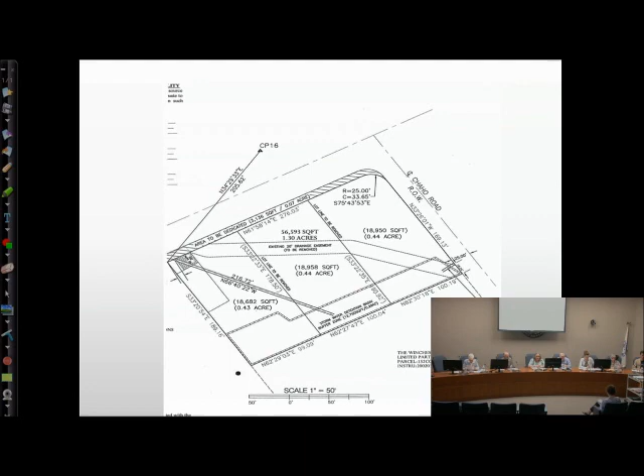Bart, where do they go from here? What's their next step? They'll have to make those corrections to the plat, and then get it signed and recorded. From there, there may be 1 or 2 little conditions left on the site plan, and as soon as those are satisfied, they'll be able to move forward with the project.

So all understand that the lot lines Betty was asking about will be removed on the final plat? Yeah, they'll no longer exist, and it'll just be one large parcel — well, somewhat large, it's 50,000 square feet or so.

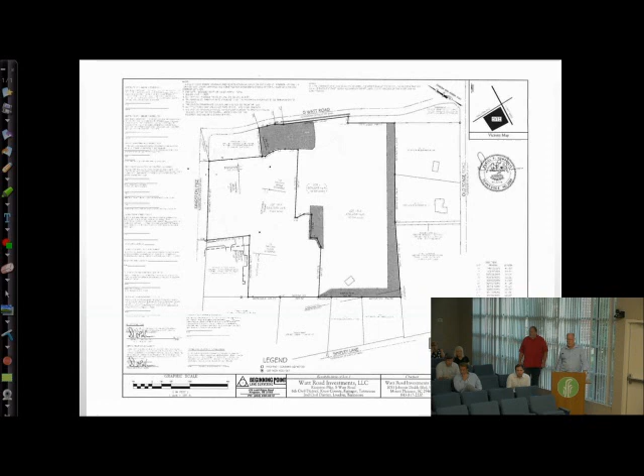Does it affect the open space requirements, splitting it like this? Well, that's one of the things we're working on, the easement aspects, with the town attorney, to make sure there's shared access to that. As was said, the zone does make provisions for internal subdivision like this. It is contemplated within the zone, so from a planning standpoint, we're looking at the entire development together.

But from a financing standpoint, they want to separate it out. Does anybody else on the planning commission have any questions or comments?

Now, we can go ahead and do that and then let them show us what they want afterwards? Okay, do I have a motion? Move for approval of the re-subdivision plat for the Watt Road Investments parcel 7803, 8182, 95, 9501, 96, and 97 as shown, subject to the two stipulations. Second. All those in favor? Aye. And you have some show and tell.

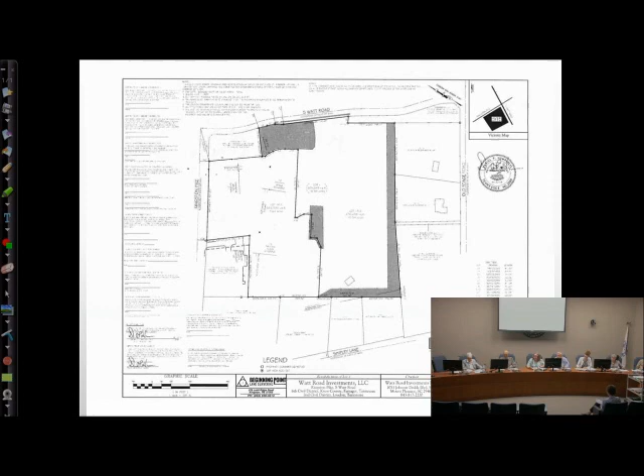Yes, my name's Mark Bollick, I'm the civil engineer on the project, 1313 Calmia Road. We just want your input on four quick items, and I'll start with the easy one first. I brought pictures.

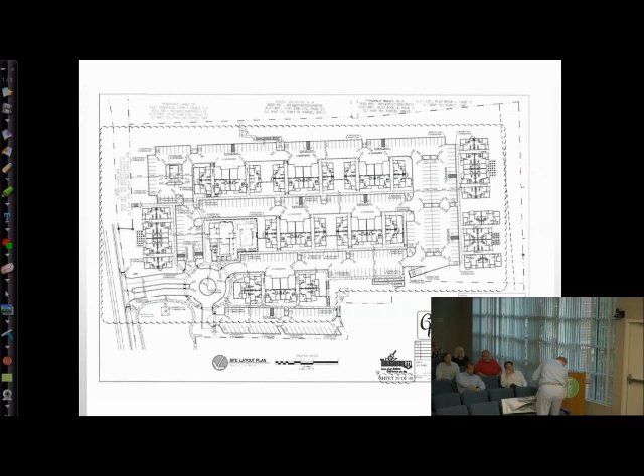Oh, he did put pictures. Let you two share. Okay, thanks. I brought big pictures. You two share.

In regards to this, as part of our last staff review meeting, staff did not like all the HVAC units clustered between the 3 and 4 story split buildings. So the architect went back and put a flat roof in the middle of the building so we can put all the units on the roof, properly screened, meeting all the town requirements. But he wanted some feedback from you to make sure this isn't something you're going to look at next month and say no.

So, we're going to make this short and sweet, I hope. We'd like, if y'all have any comments or questions, please speak up now. So they will be completely screened, yes, you will not be able to see the units. We will meet all the town requirements regarding the units. They will be properly screened, behind the parapet wall of the flat roof.

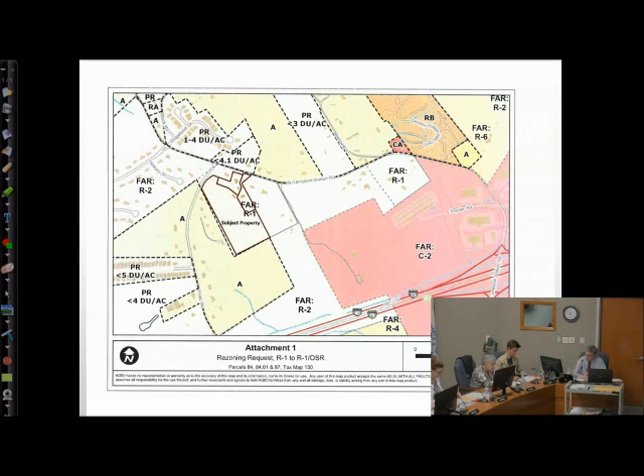The site has some topography on it, as you can see here. There's some drainage issues, some steep grades on it. There's one little potential depression that could be a sinkhole up in the northwest corner or section of the property, or in that vicinity.

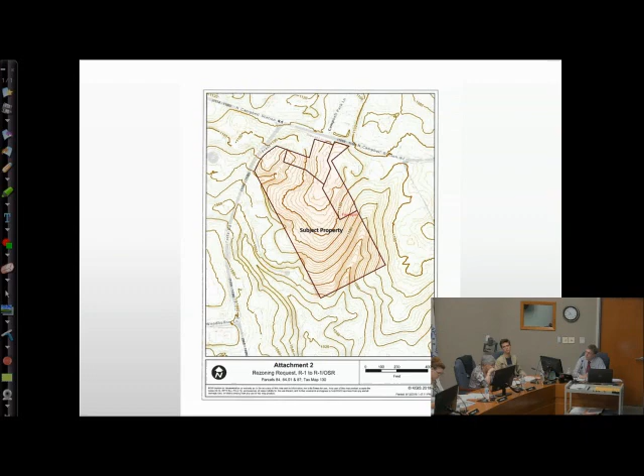It doesn't really show up at this scale, but it's there if you zoom in closer. As you can see, the property is fairly heavily wooded.

The R1 OSR would be consistent with the future land use plan, and we think it would also be fairly consistent with the existing land use in the area, the zoning in the area, and the overall development pattern. The OSR aspect would allow them to better design around the site topography and the wooded nature. So it's a fairly reasonable rezoning request. I think it would be a good fit for the area.

Of course, it's being workshopped tonight. It's just on here for discussion. I don't know if there's discussion here tonight for the request. Does anybody have any questions for Bart to start with?

One other note is that it would probably also require a sanitary sewer line extension. Based on the KGIS data, there's not one immediately at the property, but there are sewer lines in the area. I say that because typically the building sites are a little more clustered in the OSR overlay, and so in all likelihood you need to have sewer run in there.

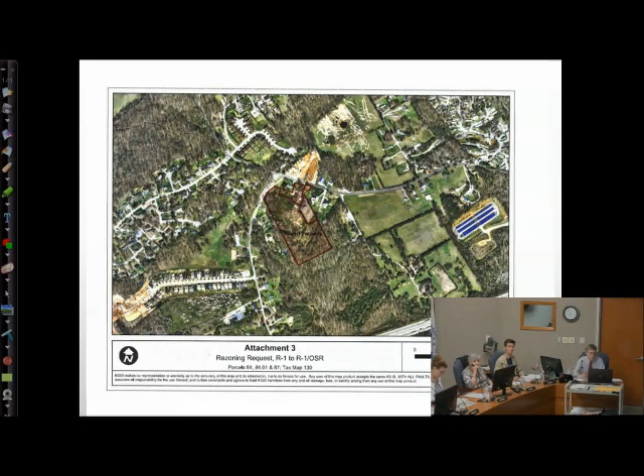Yes, I'm Richard LeMay, the engineer representing the developer. He's described what we want pretty well. The reason we're asking for this is so we can cluster the lots. They're going to be detached houses, but this will allow us to keep the same density and move away from some of those sensitive areas. I wish I had some exhibits to show you, but I don't have anything.

Do you guys know how many lots you want to put in there? 22. Okay, which is the allowable amount? That is, yes. Staff would also probably want to see the lots put together into a single tract as part of the rezoning as well.

What's the downside, Bart, is there any? I think it's a good fit for the property. It's got some topographic challenges, it's a wooded site. The surrounding area is a mix of various density residentials. It's at the edge of the town, so some of those properties you see are actually out in Knox County, but there's some higher density residential development that's been done in that area. In terms of detached single family, there's some more scattered single family development. The zoning pattern is again a mix between Farragut zoning and Knox County zoning, but some of those areas out there are zoned in the county as planned residential of various densities, that's the PR zoning, I think that's a county designation. And then there's some of your R2, and some agricultural zoning out there. So it's a mix of different density single family type residential, and we think it fits in the area and fits with the property.

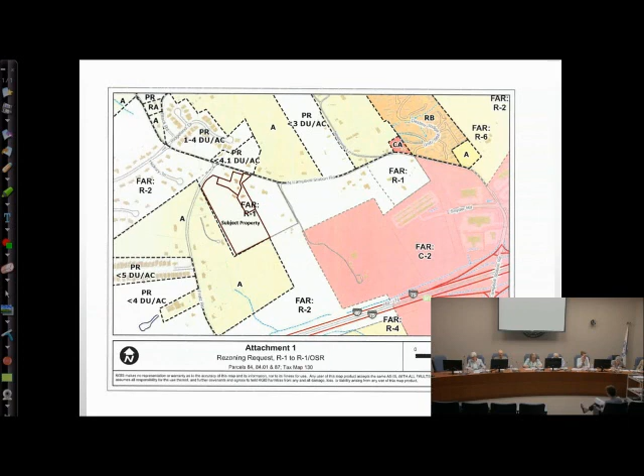Currently we're looking at the possibility that there's a house on that lot that fronts Campbell Station. We may exclude that from this development if possible, not included in our acreage that we're developing for the subdivision. That was not one of the 22 lots I mentioned earlier. So that's one possibility we're looking at, keeping that house on that lot, including it as part of the whole development.

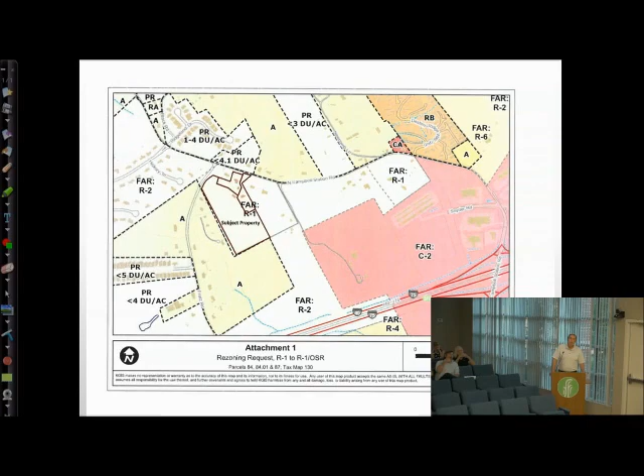Right, okay, approximately where is that? It's the second house from the intersection with Fritz Road. Okay, those back toward Farragut are houses. Okay, that one. Could you switch over to the aerial? Ms. LeMay, see if you do better on the aerial, so you would not use that access that's there now for this. No, the access will come off Fritz Road.

What this rezoning does, it doesn't increase our density at all. What it does is allow us to save some of the trees and stay out of some of those areas that are not sensitive, but they're not very developable either. So it helps everybody to keep those as open space and develop the part that we can.

And this is for discussion purposes only tonight. Yes.

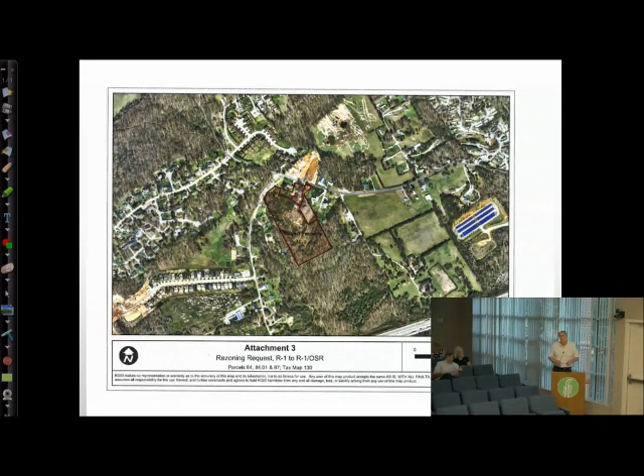Anybody else have any questions or comments? It seems reasonable to me. Appreciate it.

So will you be back next month, or is it a little bit farther along? Well, he's gone now, so.

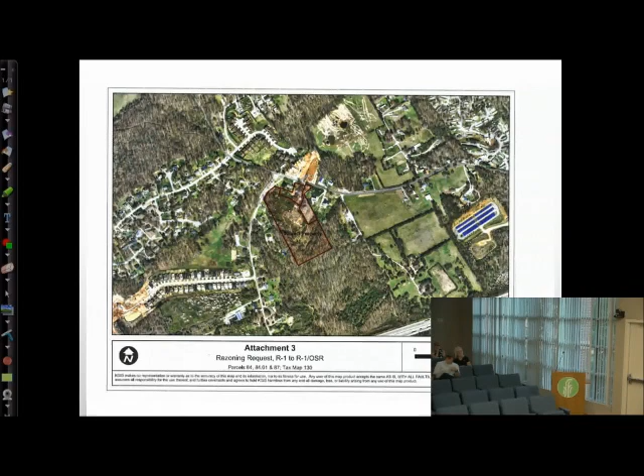So we're moving on now to item number 8, discussion and public hearing on a preliminary plat for the Brass Lantern subdivision, parcel 012, tax map 162, 801 McPhee Road, 22 acres, 30 lot, zone R-1, OSR, pending.

Wait a minute, did we miss one? Homestead Landing LLC, we missed one? Item 7 should be on, yeah, you may have. Oh, I'm sorry. Was that the one we just discussed, isn't it? No, that was item 6. This is the one we just discussed. Okay, another one from North Campbell Station, okay.

Discussion on a request to rezone parcel 93.01, tax map 130, off North Campbell Station Road, 7.6 acres, from R-2 to R-4, Site Incorporated applicant.

And this is also for discussion only, is that correct, Bart? Yes. Okay, this is another rezoning request.

It's in the same general area, actually just a few parcels down from the property you were just looking at. It's on the southwest side of North Campbell Station Road, or the south side because of the curve in the road. It's approximately 7.6 acres. They want to go from R2, general single-family residential, to R4, attached single-family residential. The property fronts approximately 675 feet on North Campbell Station Road. The R4 would not currently be consistent with the future land use plan, so the zoning would require an amendment to that plan, which right now calls for that area to be very low-density residential.

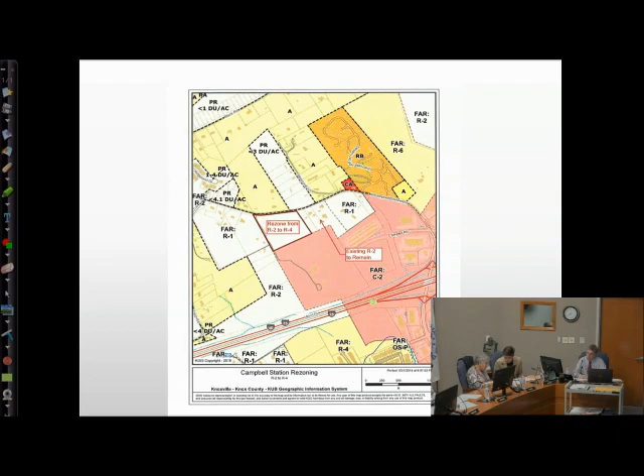Probably the biggest issue, and I don't know if anyone is here for this project, is that R4 zoning specifically requires access from a street that meets minimum design standards, and right now that section of North Campbell Station Road does not. So any rezoning would have to be conditioned on improvements—probably lane widening, curb and gutter, and pedestrian facilities—in addition to any infrastructure they'd have to put into the property. This property also doesn't have sewer immediately available, but it is in the area, so that would have to be extended also.

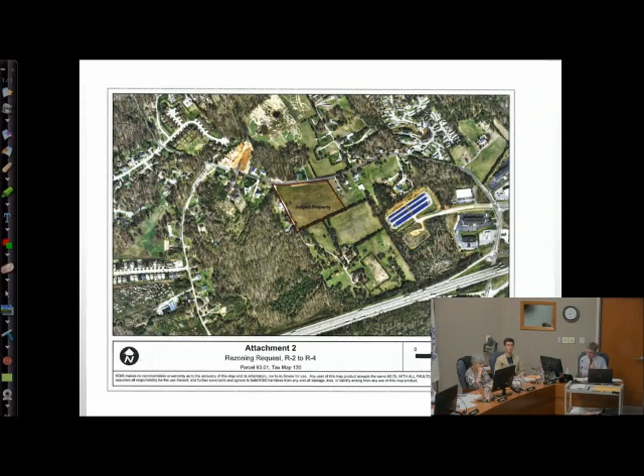Grant Berry, with Site Incorporated, 10215 Technology Drive, Knoxville.

So are you aware of both the road situation and the sewer? We're aware of the utilities. I don't believe we were aware of the road situation.

When we talk about that road, if in our dream world Campbell Station Road ever gets widened, what do we think it would be widened to—12-foot lanes, curb and gutter, or? That I don't really know, I'd want to talk to the town attorney on that. I know right now it's classified as a minor arterial in that section, and it doesn't meet our current standards for lane width, curb and gutter detail, or pedestrian facilities along it.

So you mean for the R4 zone? Yeah, the R4 zone. For the R2? Well, it's currently zoned R2, but they could develop at R2. In order to get to R4, one of the specific requirements in the zone is that the property has to access a street that meets current standards—but that's not true for R2.

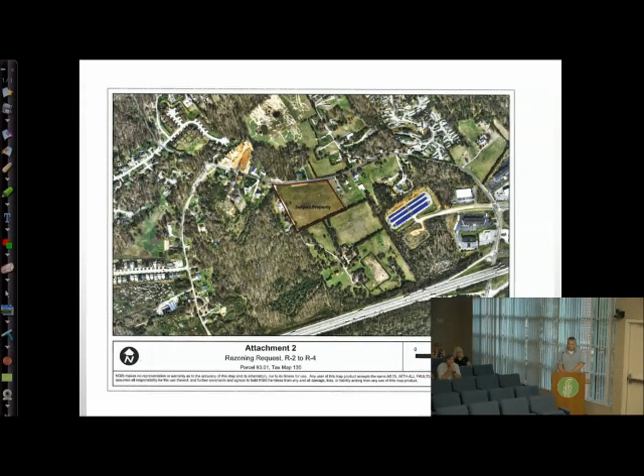Right, and so your preference—why is it you're wanting to change to R4? Because R4 allows attached townhome-type residential development. So I'm assuming you think you'll make more money with the R4 than the R2, is that right? As the engineer, I don't want to make a difference either way, but the developer, that is their preference, yes.

So how many more residents will there be on this property going from R2 to R4? You could go from, what is it, 7.5?

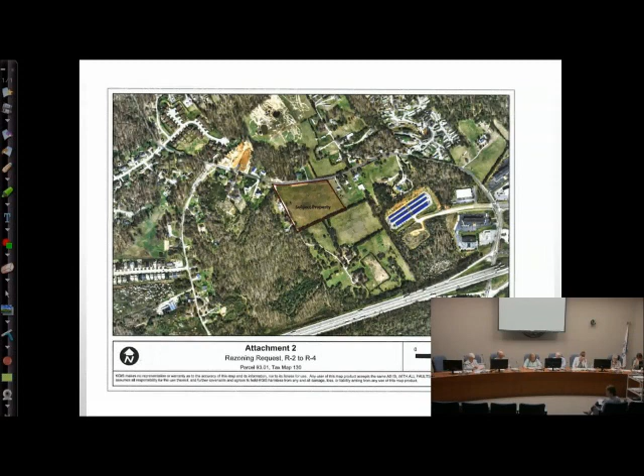Agree with Ed. Any more questions or comments?

So this has been for discussion only tonight. We'll move on now to item number 8, discussion and public hearing on the preliminary plat for the Brass Lantern subdivision, parcel 012, tax map 162, 801 McPhee Road, 22 acres, 30 lots, zoned R-1, OSR pending, Homestead Land Holdings LLC applicant.

This is a preliminary subdivision plat request for the Brass Lantern subdivision. You heard the concept plan at the last meeting and approved that, subject to several conditions. It's an approximately 30-lot subdivision with a single cul-de-sac and a significant amount of platted open space.

Currently the property is in the process of being rezoned to R1 OSR. I believe that's had first reading, so that's before the Board of Mayor and Aldermen, and it'll be coming up for second reading at the next meeting.

They have a walking trail connection that extends from McPhee Manor to the north down through the development and then accesses McPhee Park to the south, and they've been coordinating with town staff to make sure that access point at McPhee Park will work with the park improvements going on.

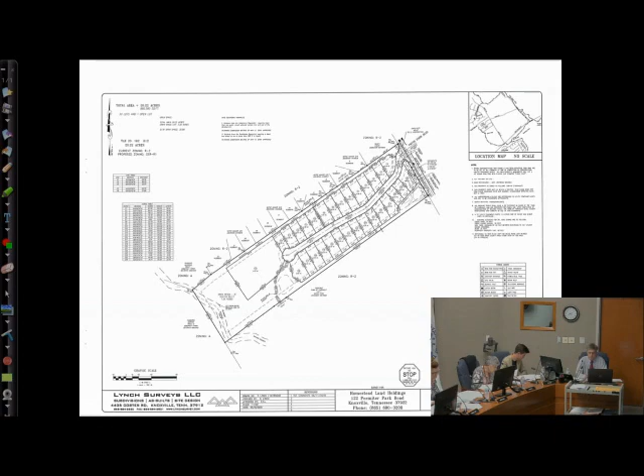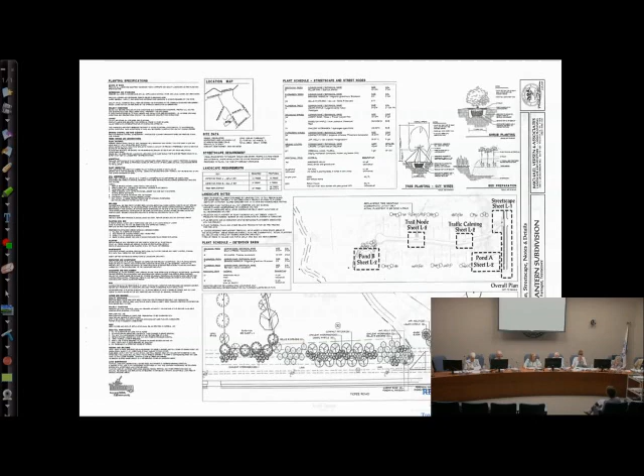Does anybody have any questions or comments? We've got some other slides if you're interested in looking at them. There's some on the landscaping they're doing along the detention basins and at the street frontage, and also on some of the landscape islands that are part of their traffic calming streetscaping plan.

Are you all okay with that? Well, go ahead, tell us who you are first, and then I'll ask my question. Russ Rackley with Rackley Engineering here, representing the applicant.

We're fine with all 9 conditions. Most of them are minor drafting cleanup stuff, and we don't have a problem with that. Okay, good. Anybody else have any questions or comments?

Do I have a motion? Move for approval of preliminary plat for Brass Lantern subdivision, parcel 012, subject to the 9 stipulations. All those in favor? Aye. Opposed? Thank you.

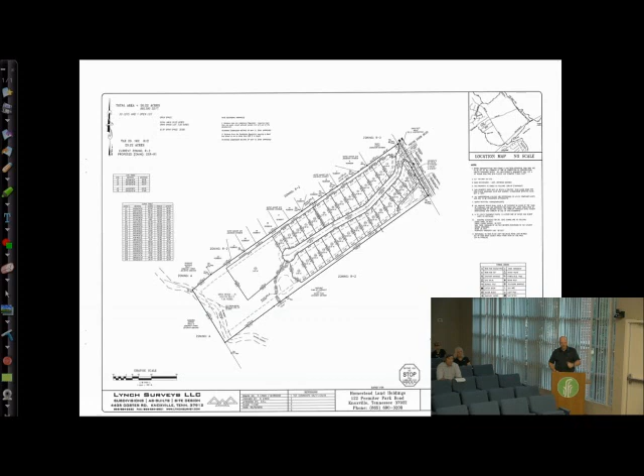Item number 9, discussion and public hearing on preliminary plat for Phase 1 of Brookmere subdivision off Virtue Road, parcels 22 and 44, tax map 152 and 152F, 87.70 acres, 90 lots, zoned R-1 OSR pending, Lose and Associates Incorporated.

This is a preliminary plat for Phase 1 of Brookmere subdivision, formerly the Harville property off Virtue Road. It's zoned R1 OSR, that's been finalized now. The concept plan for the project was conditionally approved in March of this past year. This current phase is for 90 lots out of approximately 142, I believe, which was on the original concept.

It also includes most of the streetscaping elements, the boulevard area, and 63 out of the 87 total acres. So it's a fairly large Phase 1. It's a good chunk of the development.

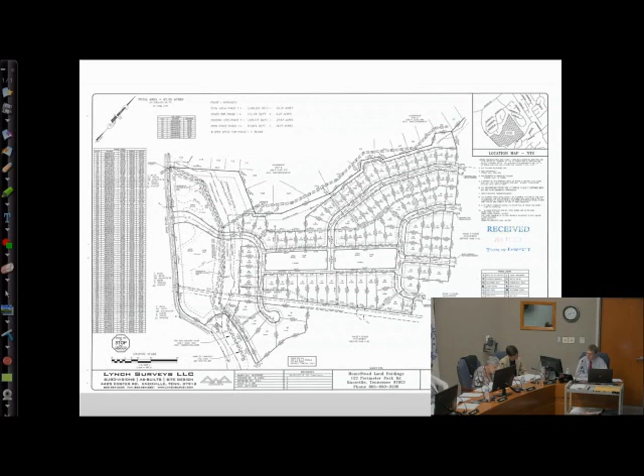You have our comments there in front of you in terms of things we think it needs to be approved subject to, if that's the board's pleasure. They are requesting a variance for some design speed issues on some curves. That's one thing that does need to be discussed, and you probably need to take separate action on that if you have a mind to deal with it. We can talk about that.

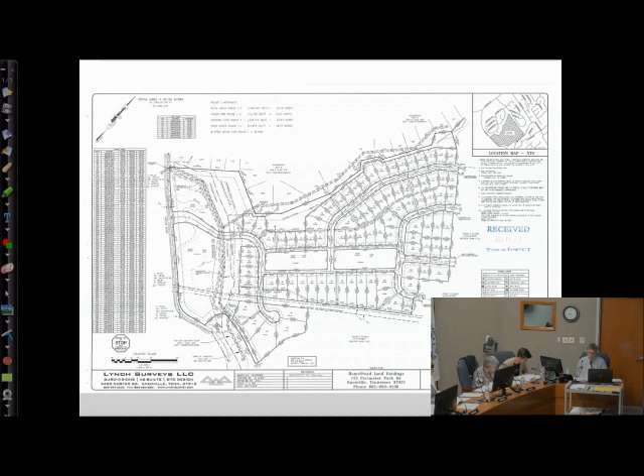I don't know if you have any other questions on any of the other comments, or if the applicants have any questions, and then maybe we can circle back to the variance, unless you want to do that on the front end. We can go ahead and address the variances if you'd like. I'll be happy to speak to those or answer any questions regarding them. Let's go ahead and do that. Sure, start with the variance.

What we're asking for is to reduce the required design speed for vertical road design on primarily 3 locations. Part of this is due to the effort to save the trees in the center, and then to save the trees around the perimeter, which is kind of dictating the overall grade across the site.

Currently, your subdivision regulations require a vertical design speed of 35 miles an hour. However, your horizontal road criteria in your regulations is equivalent to about a 25 mile an hour design speed. So we're asking—and I believe a letter from Lose and Associates was included in your packet that defines the locations—where we're wanting to request the crest and sag K values to be equivalent with a 25 mile an hour design speed.

In 3 locations, and in 1 location on Kendall Hunt Lane, to 20 miles an hour. Again, the effort in doing this is trying to make the grade work across the site.

We also see it, I think Mark even commented in our meetings that you ask us for traffic calming and to do things to slow people down, and sometimes a narrow, crooked road will do that as well. In this case, they're not that crooked.

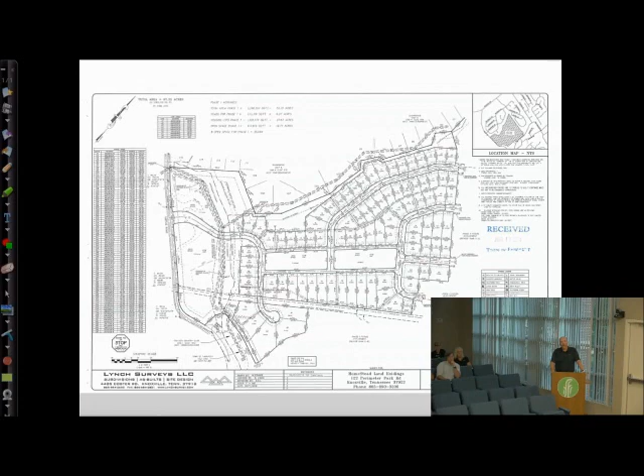Can you specifically point out on here the crests and sags that you're requesting? I can on the plan and profile, if you want to look at the plan and profile sheets. I don't know if that's in here, Russ. I don't think it is, to be honest. Do you have anything with road stations on it?

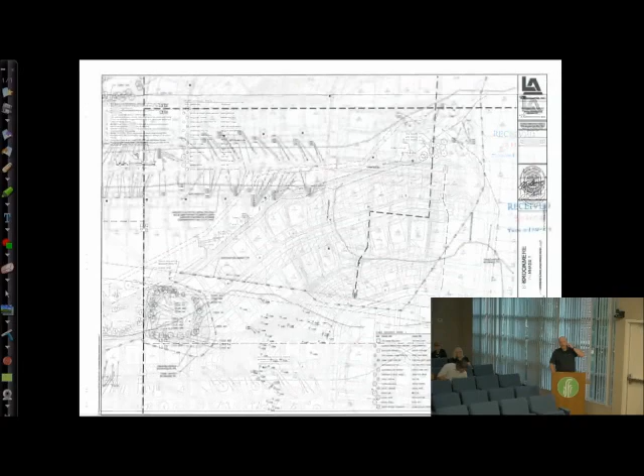I'm toggling through real quick. I don't think those were put in, in the comments that y'all had, and I think Mark sent you a set of that.

Daryl's comment, Daryl being the town engineer, is number 14 on the staff comments and recommendations. I spoke to him briefly about these, as much as I can, not being an engineer myself. It's not really my bailiwick there, but he's opposed to any of the variances on the sags, or I should say on the crest vertical curves.

Generally he's not flat out opposed to some of the sag vertical curves, although he questions some of them as to whether they're needed. He's also to some extent okay with the lower design speed at the stop conditions, which would be intersections. But the crest vertical curves he's really not comfortable with at this point, and he questioned why they were needed on some of the sags.

His thinking was that it might be best for the applicants to meet with him and go over each one of those, try to justify it, and put together a list of the exact areas they would be on, so they could be voted on either individually or as a group, for or against. With all due respect, we did that with the submittal package.

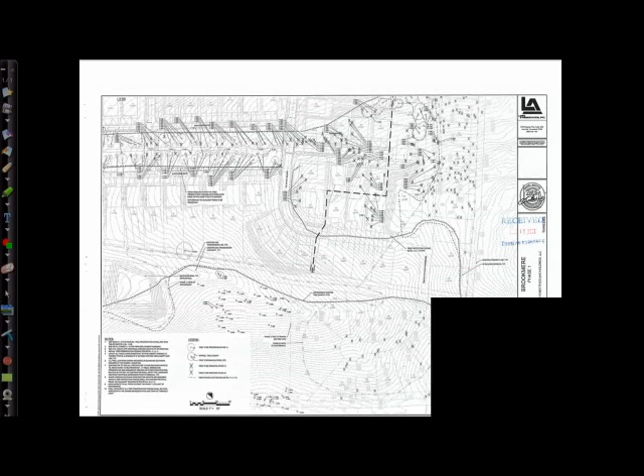But we don't have any situations where we're going up steep and down steep, right? Most of it is where the road's working its way up, or you're coming off an intersection down. There's not a situation, even though it's called a crest curve, where we're coming up at 10% and down at 10%, and it's really a blind curve. That's why we don't feel like it's that big of an issue.

It's — I understand, well let me ask you this. Not quite as hilly as Kingsgate. Let me ask you this, just because I'm a visual person, I'm trying to visualize this.

Where you're asking for these exceptions, I'm going to throw out a question that might be really stupid. You're coming over a vertical, driveways coming out — are you designing to know this location, this is where we've asked for a variance, and we might have an issue here of conflict because they need to be going slower here? Are you envisioning, is where you place your driveways important when you're doing this for cars that might be coming out as cars are coming up?

It could be in more severe situations, but I don't think we have any opposing grades here that would dictate that. And by opposing grades, I mean going up and down, where your sight distance is completely limited by that curve. Most places we're going up and over, or up and down slightly — we're not having that severity.

But definitely, we've not obviously picked floor plans for all these lots yet, but that's always a consideration where we place driveways of where we can get them in.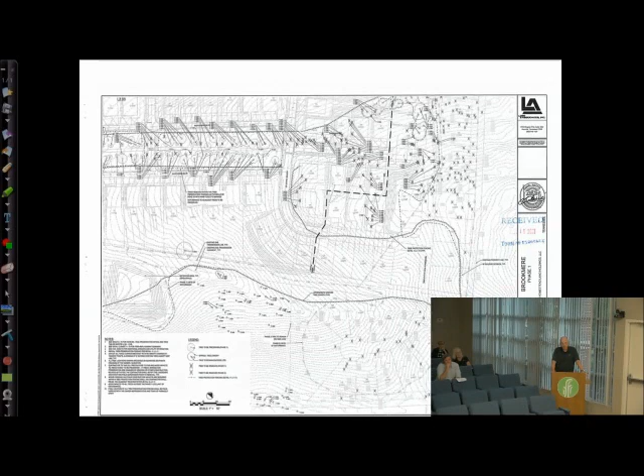I'll say I'm not real comfortable with going against what Darrell was concerned about with these crests and the dips, but the roads are kind of straight where some of these are, and I'm afraid speed is going to pick up regardless of what we have it listed to be. I think most of us know what happens in any roadway where you have a 25-mile-an-hour speed. Nobody's going to go 25 miles an hour. Well, I will, but yeah, I do as well.

Let me ask you this, because your neighborhood may want it if they're dealing with that. We talked about speed bumps. Is that something you would put, and you can't put that in a location where you've got crests, correct? No, generally you would—well, you can put those vertical traffic calmings pretty much anywhere, but you would back off from a sag or a crest and put them in straightaways, where most people, it's human nature to slow down through a dip or a rise. It's just human nature to let off there.

So usually it's the flat, straight sections where the foot gets heavy and it gets away from them a little bit. Well, I'd hate to see us creating, on the crest in particular, a situation where you could have a driveway just over the crest or on the crest, or people that may be there temporarily for a while. They park there because somebody's doing something at their house and they got to be out of the garage, so they park on the street momentarily. I've seen and personally experienced situations like that where it's extremely dangerous, 20 or 25 miles an hour either one, because purely the sight distance. If it comes down to a few trees in a location versus that sight distance, trees lose, in my opinion.

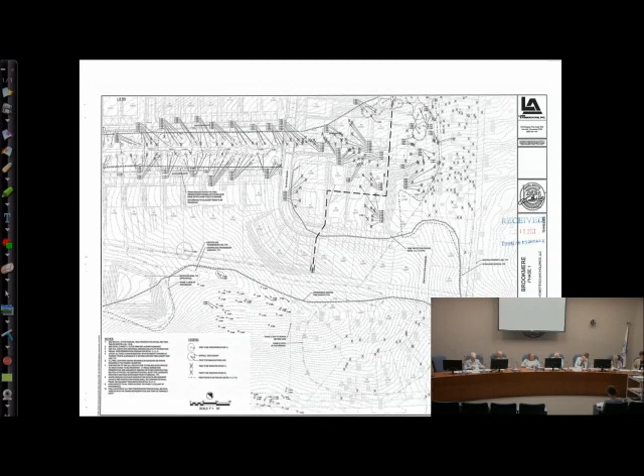I'm talking about that one location. Which one? The one between Station 4+50 to Station 6 on Needle Grass. Oh, that's where we're talking about the requiring fill. Over the bridge, right? But just the crest problems are problematic to me. Well, that's actually a side curve there, and there's no houses there. No, that would be a sag going across the bridge. You start up the other side, so that's that transition from the bridge being relatively flat to going up the hill and then around the corner.

And you don't have anything that you could point out where these places are to us? No, I don't have the stations on what was put in the PowerPoint. But I mean, I was just looking at Daryl's drawings. I'm not in a position to recommend something contrary to what the town engineer is recommending.

I'm sorry, he was talking to, what was it, Commissioner? Well, I was just reading from Daryl's note, but maybe I misread it.

Does anybody else have any questions or comments? Is there anybody in the audience that has any questions or comments, either for the staff or the applicant?

Can you show me, you have the drawings, can you show us where the 4+50 station is, and is that how you say it? Yeah. How do you say 6+0? Yeah, six. Okay, 4+50 and 6+00. Okay.

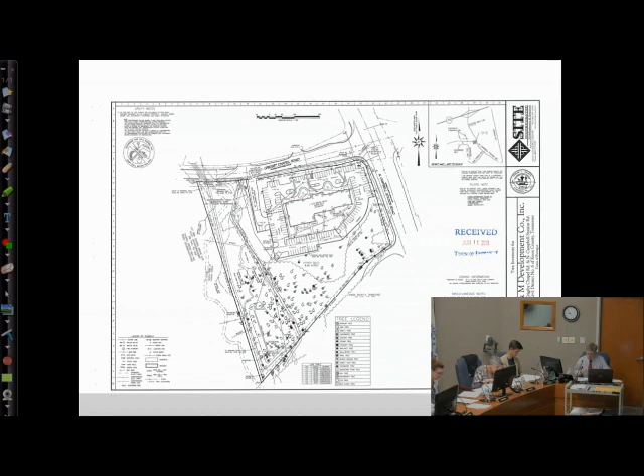The new development is going to be integrated into the existing site. It involves - I don't know if I have a shot that shows it real well, but after the development occurred, they separated out the existing building with a land lease line, and they also put in some other easements for access, and also access and parking in various locations. So they're integrating this expansion of the site into the existing development with those easements.

This involves the new building and some additional parking that's going in. They also want to relocate a section of the greenway. That will require replatting that easement, and as part of the replatting process, they'll also have to dedicate a little bit of right-of-way there on Grigsby Chapel Road.

They're aware of that. That did not make it into the comments and recommendations, so that's an additional note that should be part of the motion, if you are so inclined to approve this, subject to staff comments and recommendations on that. Yeah, that would be number 19. It's noted in the write-up, but it didn't get into the actual list of comments and recommendations.

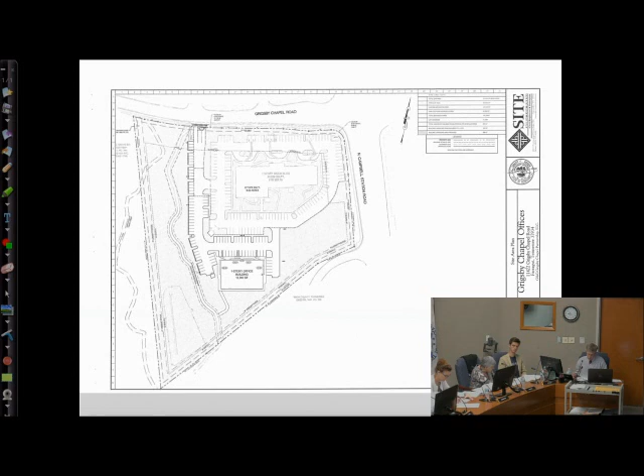Okay, so I just wanted to make sure that got in. I think you can see under the discussion, it's the last two sentences under the discussion in the write-up. I don't know if there are any questions on any of the comments that we have in there. If there are, I'll be happy to address them.

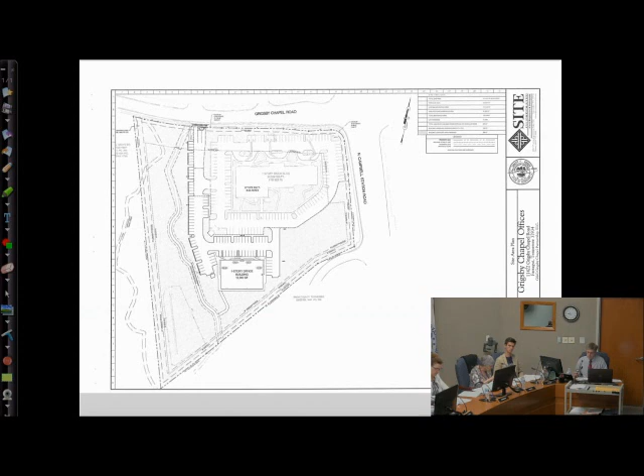Can I just get the point that we need to - is it just, the final note is dedication of right-of-way? Well, if they're going to relocate a section of the greenway that's currently within a platted easement, so that easement will have to be replatted and moved on the property. And because of that, they'll be in a re-subdivision and replatting situation. And it turns out there's a little bit of property, or a section of Grigsby Chapel Road there, that doesn't have the full right-of-way width, so they'd have to dedicate a little additional right-of-way there on Grigsby Chapel, which is fairly typical. It's the same thing the dentist's office had to do that was here earlier.

Is that near Grigsby Chapel where the relocation would be? No, let's see if I can find the right section. I can't quite make out the notes, but I think it runs from somewhere here to somewhere down there.

Right now the easement runs very straight, so they'll be moving it. So they'll be putting some curvature in it? Yeah, in that area they would have to go in and move the easement to accommodate where they want to move the greenway for the project.

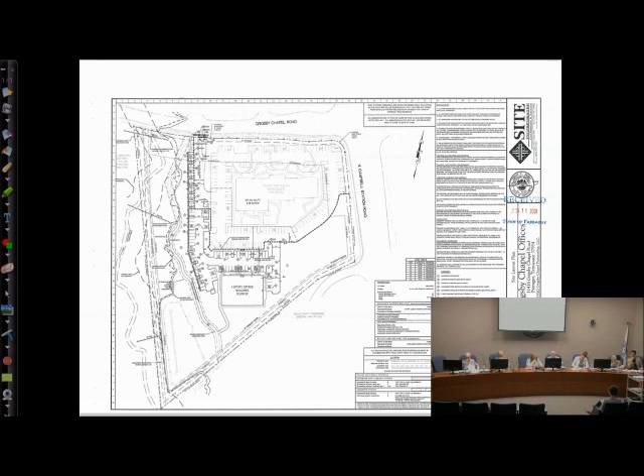There was some concern by town staff that this area up here is going to be a little close, with these parking spaces and the pedestrian linkage they want to bring in running right through here, with traffic turning in. One thing the applicant wants to do is arrange with the shopping center across the street, where the Mellow Mushroom is, for overflow parking. There was concern that when people walk to the parking spaces there could be a conflict between cars turning in and out.

Where this sidewalk area is going to extend, people could step off it into the parking area to access further up the lot, with cars turning in and out. So we wanted to mention that. We don't know if there's a way to address it or redesign that pedestrian connection. The grade drops off, and it would be nice to tie into the greenway there, but the way it's graded could be an issue.

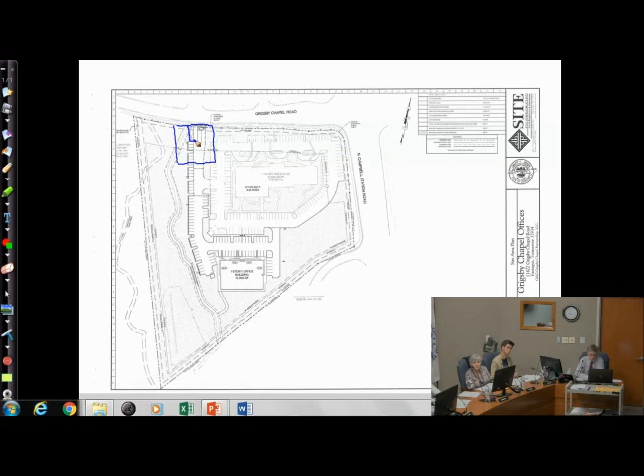Can you tell us one more time who you are? I'm sorry, Grant Berry with Site Incorporated, 10215 Technology Drive.

With the way the grade is through there between it and the greenway, the only way to move that connection would be to eliminate a handful of spaces to pull it further away from Grigsby Chapel. Right now it's 50 feet from the travel lanes of Grigsby Chapel, so any cars turning in would be straightened out by 50 feet, out of the turning movement, giving decent visibility looking up the road before people could get onto the sidewalk as it stands now.

But if we need to eliminate another space or two to pull that connection another 15 feet away or so, that could be done.

Anybody on the planning commission have a thought on that? I always like to be on the safe side when it comes to people walking on sidewalks and trails. I agree.

I'm the same person who spoke last. Robert Hill, 11504 Mountain View Road, Farragut, Tennessee. I walk that greenway almost every day, and I looked at the drawings this afternoon with our planner, Bart. The movement proposed for that greenway, I think, is inconsequential.

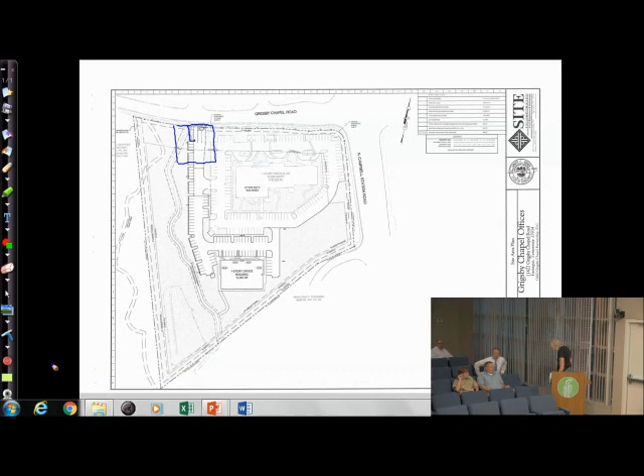Anybody else have any questions or comments? I think we were supposed to see a color and materials board, item number 14. Okay.

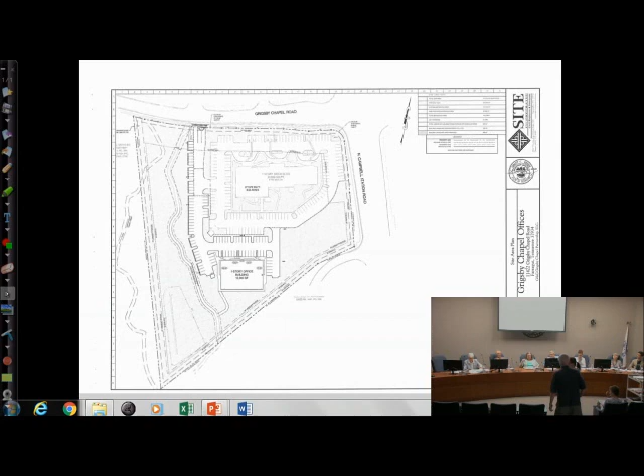Can you tell us who you are? You've never been to a town meeting before, please give us a name and address. Kelly McCarty, and I live at 480 Chapel Grove Lane.

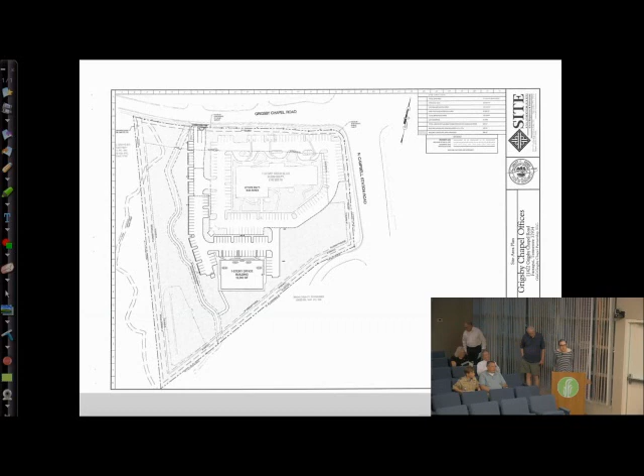My objection is to the additional parking we were talking about a minute ago, to accommodate spaces for the Mellow Mushroom employees across the street. I don't see the need to have extra spaces there and have them crossing the street. If they need extra parking, if you drive by that parking lot for the office that's already built, there's always empty spaces, if not an empty lot. So why they're not parking there already is a question I have. I would not like to see extra spaces added that aren't required for the additional office building requirements.

Bart, is it overparked now? It is an overparked condition. By how much? I don't have the number right in front of me, but I know we calculated that at one point, and they did have to go in and do some redesign work to add additional islands, and also do some pervious paving in those areas. So that was something we brought up. There is more parking there than needs be.

I don't see any need right there. I rarely ever see that parking lot presently full. They're adding 88 more spaces. Yeah, and based on the size of the additional building back there, it's way overparked. They do have potential plans to, at some point in the future, add a third building, so that may be generating some of the additional parking. I know the applicant can maybe speak to the reason for the extra parking.

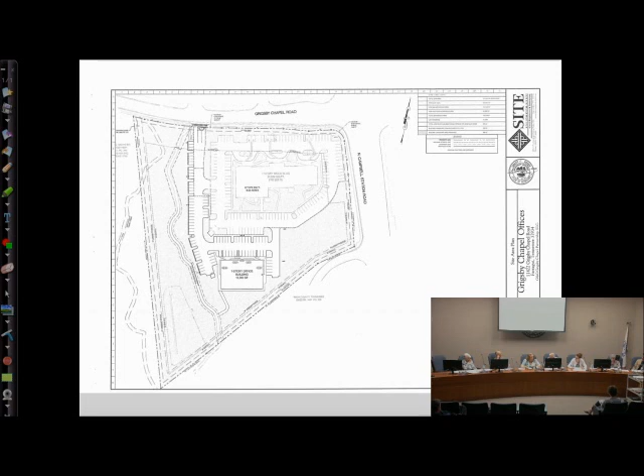That's one of the things that bothers me, the people crossing Grigsby Chapel. But we've passed, in our first budget, a CIP amendment to include a pedestrian-activated, signalized crosswalk, so that people can get across there safely.

Okay, yeah. Do we need to add the verbiage for 19, or do you want us to have that on record? Yeah, I wrote out what 19 should be. Yeah, that would be fine.

With the Grigsby Chapel Greenway being relocated, an associated easement will require replatting, and the replat will need to include additional right-of-way dedication along a section of Grigsby Chapel Road. Does that sound right? Yeah, that's fine. I should be able to read my own handwriting, and I don't, so. That would be 19, subject to 19. Did you guys hear that, and you're okay with that?

Okay, and then they'll be eliminating those 3 spots as part of addressing item 2. Okay, item 2, let me go back to item 2. Oh, wait a minute, no, that's the wrong one.

Item 11 is the one that deals with the pedestrian conflict at the ingress and egress point. So what do you want, and the removal, do you want to take that out and say, instead, removal of the first 3 spaces? That'd be fine. Then removal of the northernmost 3 spaces, is that correct? Is that clear enough for you?

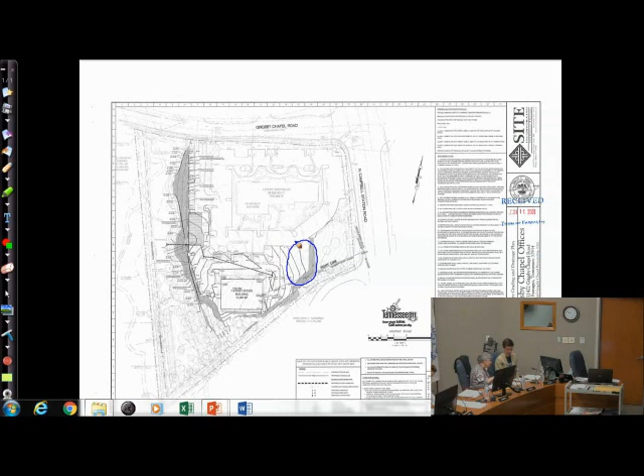It's 10 to 10, they may have to change the tape at 10. So do we want to go ahead and do that now before starting the last one? Yeah, let's take a break. Check real quick. Oh wow, I bet you will. You want some fries? Thank you. Cold fries, yeah okay, I think there's a knife in there.

Another consideration, shown on the second board, is a masonry brick which complements the brick in terms of its height. It's a little wider, it's 16 inches wide, but we feel it would complement the stone, the oversized stone on the existing building, more appropriately than standard 4x8 brick.

I don't know what you mean by that. Do you have something to show us? Why don't I bring the board to show you. I don't have a physical sample, but if you don't mind, I'll come up and bring that.

This is a through-wall stone, a concrete material that's poured similar to concrete masonry units, but it's designed in both color tones and material finish to appear as brick. It's also a structural component and can be used as part of the structure. I believe there are some buildings in the area that have those, although I couldn't give you a good example.

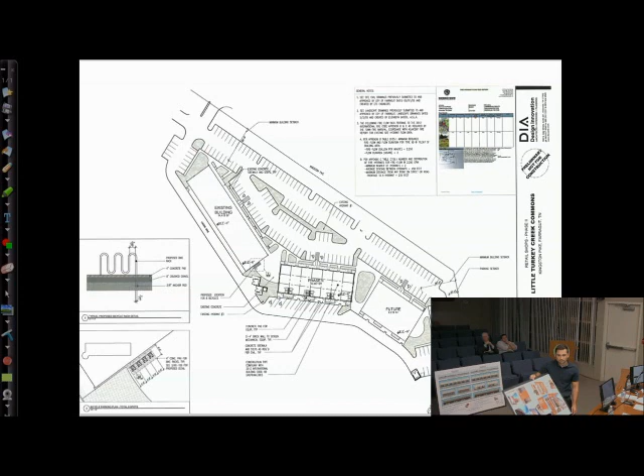I'm not sure, do you have any experience with this? It's essentially a concrete unit similar to CMU, not that gray cut stone. They are manufactured to the size of brick. It's not a solid clay material, it's a concrete composite material. Does it have to be laid like brick? Yes, it would be laid like brick, with grout joints and everything the same.

What was the reason you couldn't comply with the request to bring the materials and color board? I apologize, we understood to bring a color board, and I was noted today that we should have actual materials, so we did not bring those, but we can obviously bring those at a follow-up meeting.

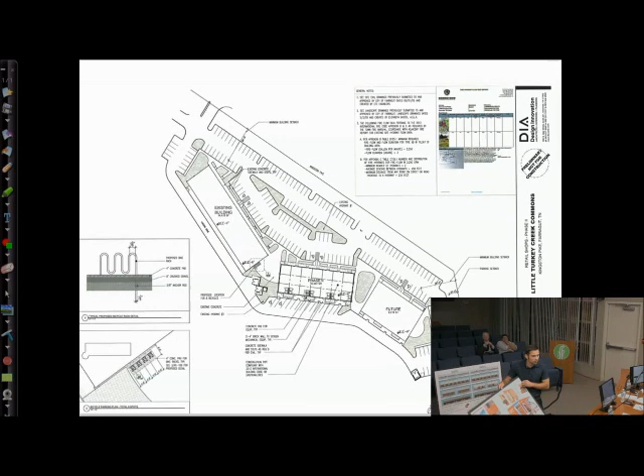You would want a variance from the 75% masonry requirement. How much variance? It could be what we're showing on this model here - let me bring this up so you can see it closer. This option shows the EIFS stopping, with brick all the way up for 75% compliance, potentially coloring the brick to play with the EIFS. This other option has parapets around the side with brick below, shown here at 53% masonry, though we could adjust the parapet size, but roughly we're at 55% versus the required 75%.

And what's the percentage on the current building? Zero - the current building doesn't have any brick on it, because that building was built before the architectural design standards. This being a new building, our architectural design standards apply to it.

I understand. I'll say this, and I know because I'm impacted, I'll be looking at this all the time. I have a few things - I have struggled with our architectural design standards, mostly because I'm not an architect, so I struggle with what we were trying to accomplish with it. I think really we wanted to make sure we were getting classic construction, timeless, something that wasn't going to age itself. But I'm looking at the back of this building, which won't be visible to anyone, and we're making them brick it - the whole back of the building is bricked, and it serves no purpose because it's just going to be employees and the gentlemen that come to empty the garbage, and the air conditioning units.

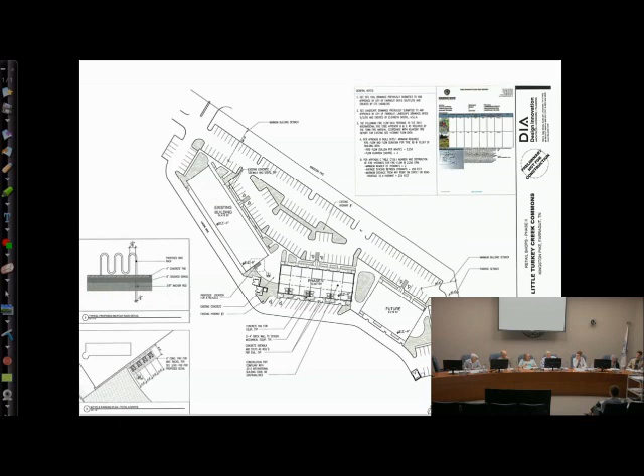I think the thing is, if we make this concession here, there are going to be other concessions requested. Let's talk that through - where do we see that happening? West End may be looking to build a building, but where do we see this exception where we might have to apply it again?

Well, I don't know that we can decide that off the spur of the moment. Okay, but then once you go down that road, over time - we haven't had very many instances where we've been precedent oriented, but there have been some very important ones. It goes back to even when people would do things and then come and ask for forgiveness afterwards. I just worry about setting precedents where I'm not clairvoyant enough to know when it's going to come up, but I know it will come up.

Well, I mean, we've already backed off on that over time - the lesson to me is that when these things come up, I can't sit here and think over and answer a question in two minutes. I understand, but it will come up - you open Pandora's box. We already backed off the brick requirement for the apartments across the...

Which one, on Campbell Station Road? Overlook, yeah. That was sort of before my time on the standards - I don't have that historical perspective on some of these projects. But we did back off that requirement to about 63 or 65%.

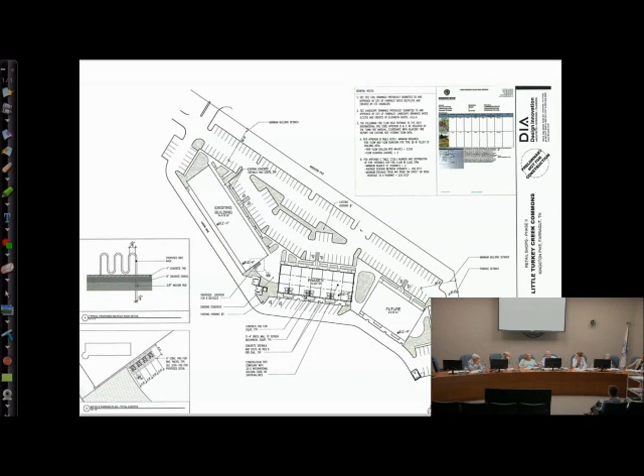But not on the front ones on Campbell Station, I didn't think. I thought it was the back ones that you didn't see from Campbell Station. I think it was the Clubhouse that we saw from Campbell Station, and we did stay with that. And also, wasn't the timing an issue too - we had started that process before the architectural standards were done.

Right, the process with those apartments had started before the architectural standards - they had not gotten approval yet. I think on that one, it was started before you bumped it from, what was it, 60 to 75? Yeah, and I think that was the issue. I came in at the tail end of that, but I think that's what it was.

Right, but I have found that if you give exceptions in one place, somebody's going to come to you for exceptions in other places. I understand, but if those exceptions are because we're trying to maintain the integrity of the design of that development, isn't that the time to think about giving those exceptions?

Yeah, it's pretty tough to have a hard standard where you're redeveloping against - this isn't redevelopment. Well, it's a separate building. It is, and the way it's facing and everything else - it's gonna, I disagree with it - it's gonna look that much different to everybody going by that.